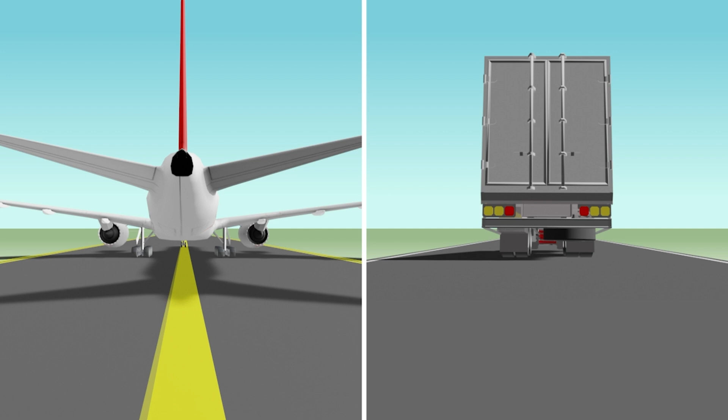Aircraft wheel loads and tire pressures require thicker pavement sections to protect the subgrade.

The earliest airports were constructed utilizing highway specifications. Airport operators soon realized that airport pavements constructed to highway standards did not perform under aircraft loads. The heavier aircraft tire loads caused the pavement to rut and shove, resulting in unsafe surfaces and conditions for aircraft operation. In the early 1940s, the Civil Aeronautics Administration (CAA), precursor to the FAA, in partnership with the Public Roads Administration, developed standards for construction of airport pavements.

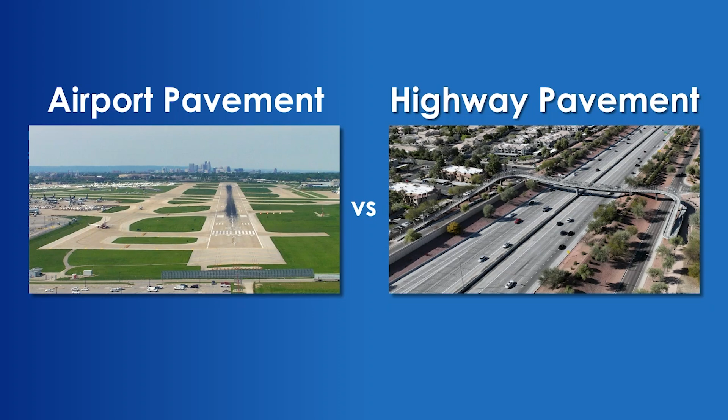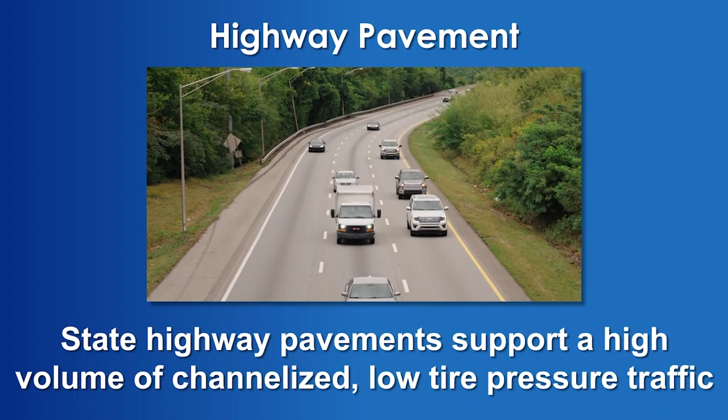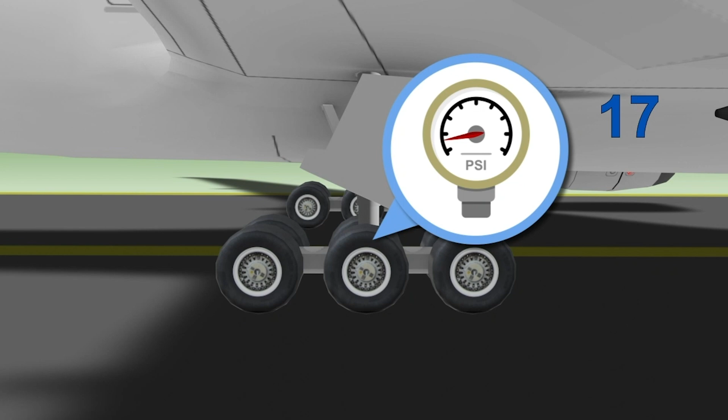Airport pavements and highway pavements are fundamentally different. Airports construct pavements to support a low volume of distributed high-load, high-tire pressure traffic. States design and construct highway pavements to support a high volume of channelized, low-tire pressure automobile and truck traffic. The combination of higher aircraft wheel loads and tire pressure requires using higher quality pavement materials and construction methods to ensure the long-term performance of airfield pavements.

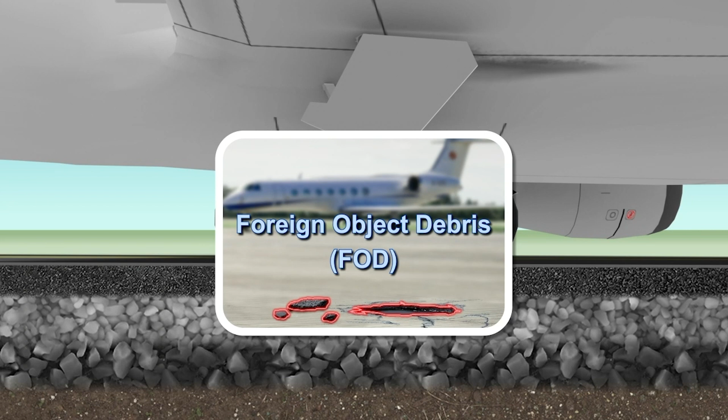Aircraft engines are sensitive to damage from pavement debris, often referred to as FOD, or foreign object debris. Airports must construct pavements to more stringent standards to minimize the potential for FOD.

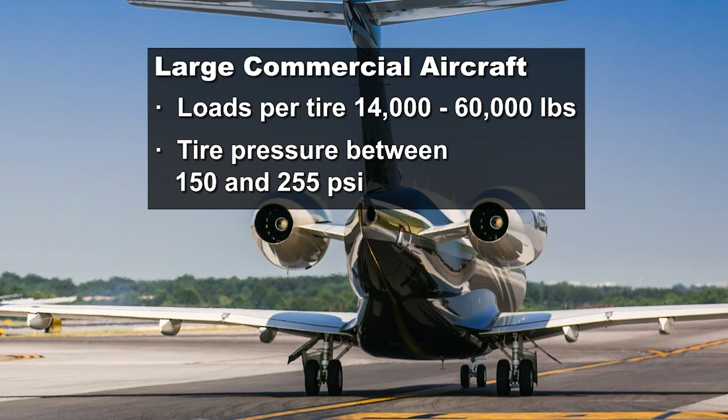Tire pressure and load vary by vehicle size and type. A large commercial aircraft geared tire has loads from 14,000 to 60,000 pounds per tire, at a tire pressure between 150 and 255 psi. A tractor-trailer tire is loaded at 4,500 pounds per tire, between 85 to 110 psi. An automobile tire is loaded between 1,000 to 1,200 pounds, at a tire pressure between 35 and 45 psi.

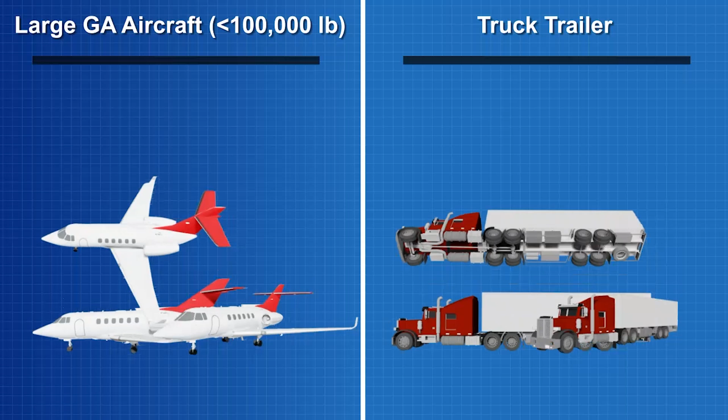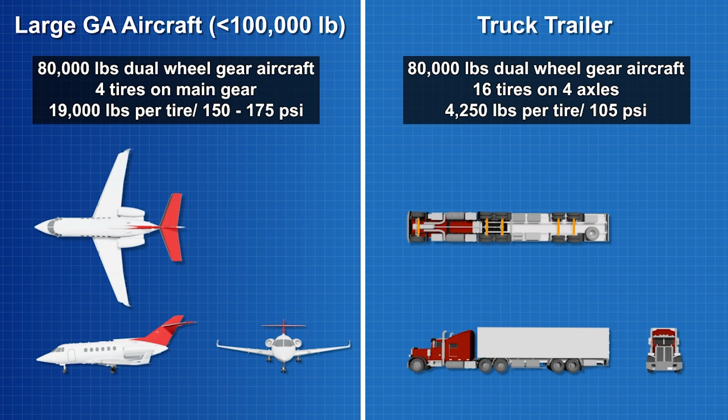Consider an 80,000-pound airplane and an 80,000-pound truck. 95% of the airplane's load is in the main gear with 4 tires and a loading of 19,000 pounds per tire. The truck has approximately 85% of the load on 4 axles with 4 tires per axle, with a loading of 4,250 pounds per tire. So even though the gross weight is the same, the aircraft load per tire is 4.5 times higher than a truck tire load. The FAA developed the current standard specifications for construction of airports, specifically considering aircraft loadings.

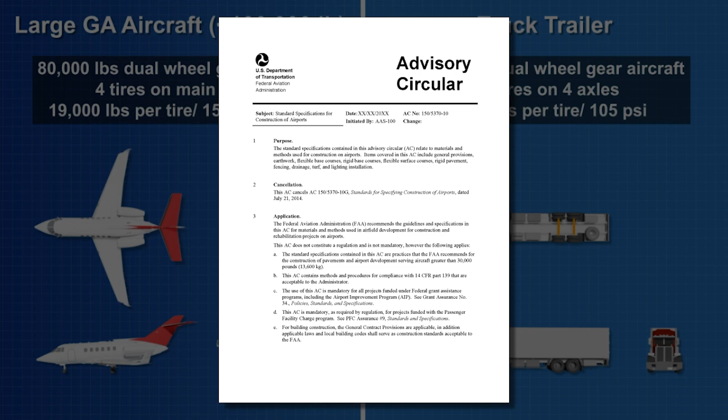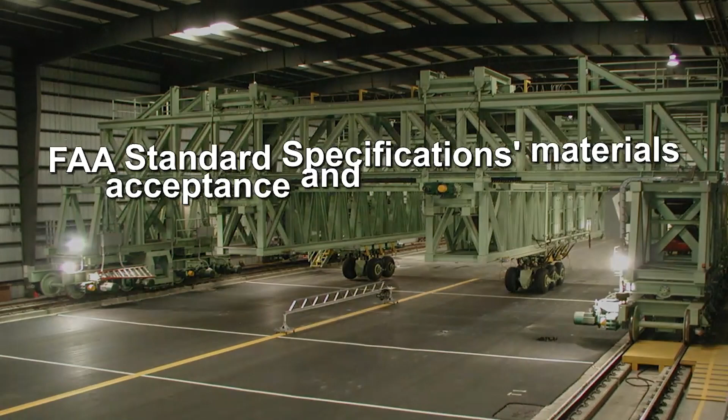The FAA validated these specifications under full-scale aircraft load testing. These specifications are broad in nature since the FAA uses them throughout the United States. FAA standard specifications materials acceptance and testing are on a project-by-project basis. Note, there is no such thing as FAA-approved pavement materials.

Pavement materials must meet the requirements of the individual project specifications. However, the FAA does maintain a list of approved electrical equipment and materials.

49 USC Section 47105C allows states to develop state standards for airport development at non-primary public use airports. The FAA limits the scope of these standards to construction specifications for subgrade, subbase, base, pavement surfaces, and related materials for drainage, fencing, and turf.

State aviation standards for airport pavement construction are specifications that, when approved by the FAA, may be used for pavement construction at non-primary public use airports in the state for which the standards were developed.

State standards are developed by modifying sections of FAA specifications. State aviation agencies should contact the FAA Airports District Office or Regional Office of Airports to discuss the process for the development and approval of state aviation standards for airport pavement.

When developing state aviation pavement standards for use on airports, the starting point for the standards must be the FAA's standard specifications in AC 150/5370-10, Standard Specifications for Construction of Airports.

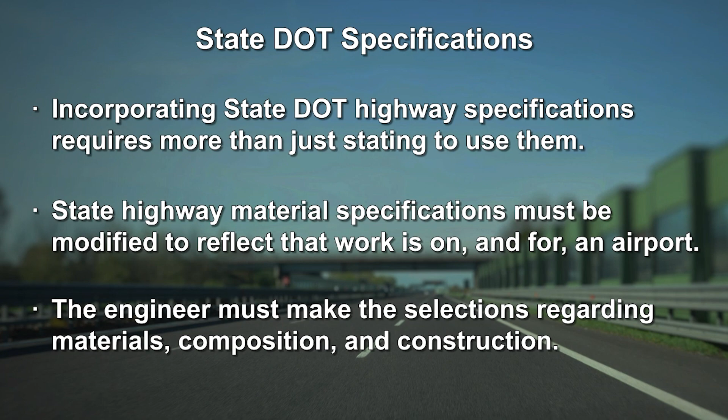States must modify highway materials specifications to reflect that the work is on and for an airport. The engineer must make the selections regarding materials, composition, and construction. Due to the differences in how state DOT highway specifications are organized, the project specifications must include copies of the reference state's state highway material specifications.

When using materials from state highway material specifications, be sure to consider: 1. Materials - the engineer specifies which materials to use; do not let the contractor choose which state materials to use. 2. Composition - the engineer specifies any choices such as gradation, binder grade, or job mix requirements. 3. Construction - the engineer addresses any changes needed for construction, such as more stringent mat and joint density.

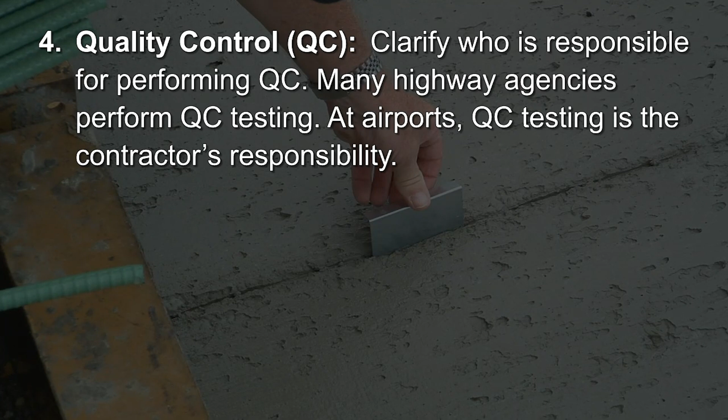4. Quality control, QC - clarify who is responsible for performing QC. Many highway agencies perform QC testing; at airports, QC testing is the contractor's responsibility. 5. Quality acceptance, QA - clarify that the owner must perform QA. 6. Measurement and payment - clarify how to measure material and what constitutes acceptable work.

Materials may meet FAA specifications, but there is no such thing as FAA-approved pavement materials. Being approved for use on highways does not mean it is acceptable for use on an airport.

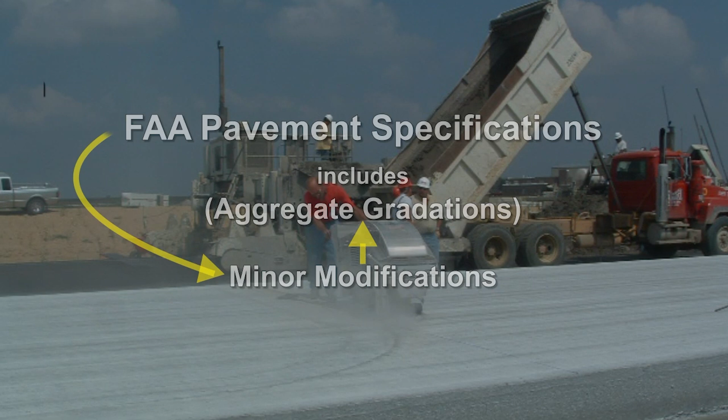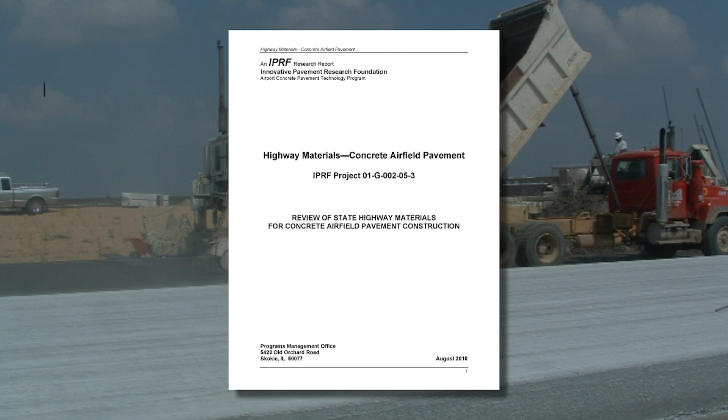FAA pavement specifications, including aggregate gradations, provide an option allowing minor modifications to aggregate gradations to permit for using local materials. The Innovative Pavement Research Foundation (IPRF) Study 01-G-002-05-3 is a reliable resource comparing the differences between FAA and state DOT highway specifications. The study is available at

www.iprf.org. In summary, states may develop state aviation standards for airport pavement construction for use at non-primary public use airports by modifying the FAA standard specifications and seeking approval. Once state standards for airport pavement are approved, they may be used at non-primary airports within a state.

States may use state highway materials on non-primary public use airports serving aircraft less than 30,000 pounds. States may use state highway materials specifications on individual projects on non-primary public use airports serving aircraft less than 60,000 pounds with a modification of standards (MOS).